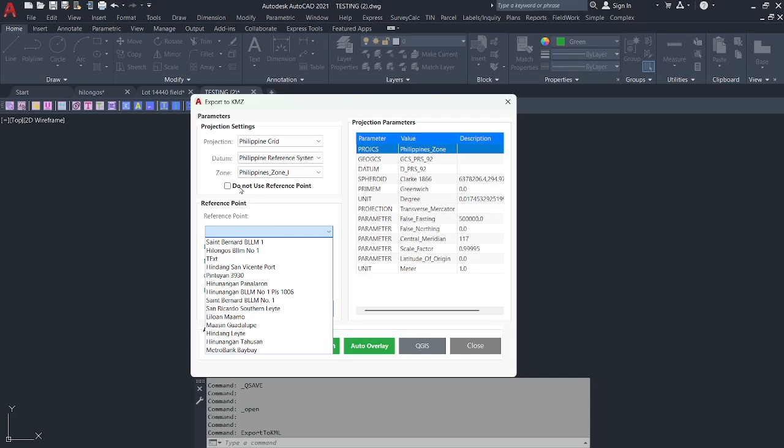Kasi usually noon we use a reference point, right? But this one is not accurate, and the more malayo yung lugar natin sa reference natin, hindi na naging accurate. So ngayon we have the option na hindi na natin gagamitin ang reference point, kundi gagamitin natin yung survey points na resulta ng RTK, yung data ng GPS natin.

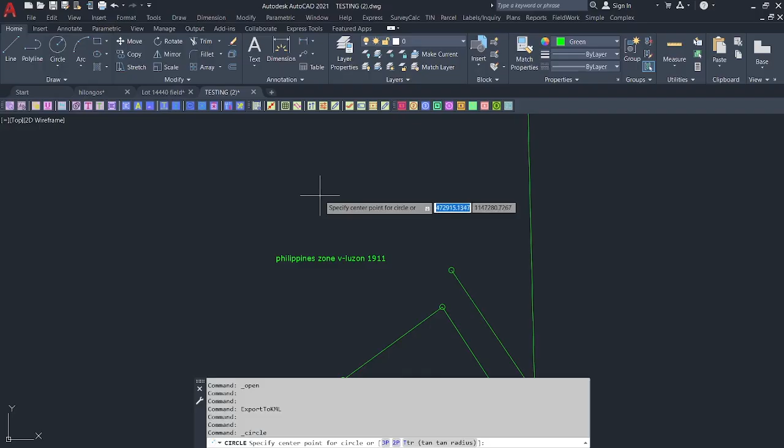So usually I close this one first. Usually pag nagso-survey ako, i-average ko lang, for example dito, ito yung area. Ito is taken from a GPS point. So usually nagsiset up lang ako ng base ko dito. For example diyan nagsiset up ako ng base, tapos ina-average ko yung.

Hinayaan ko yung GPS na mag-a-average ng coordinates sa base station ko. So usually itong GPS ko, hindi ako nag-occupy ng known station or known coordinates. So sa Hi-Target, hindi ko alam sa ibang RTK kung parehas din yun. So nag-a-average ako. Ngayon, once pag nagagawa ka ng job.

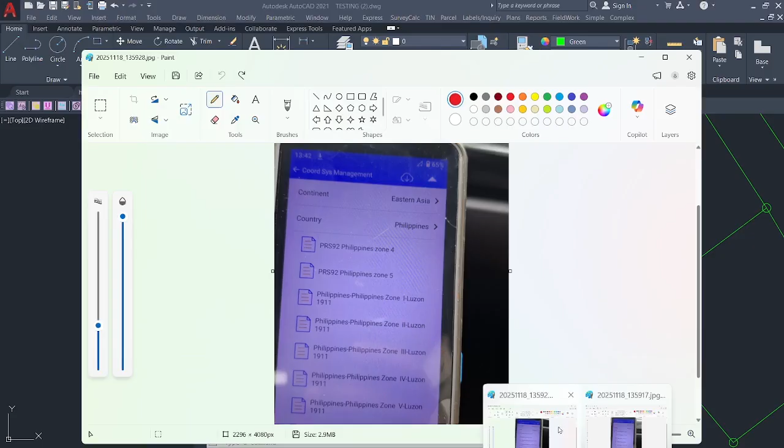Doon sa coordinate system mo, pipiliin niya kung anong coordinate system ang gagamitin mo. Sa Hi-Target, usually ito yung mga reference point, pero siguro parehas naman sa Hi-Target o ibang RTK. So usually meron ditong PRS 92 Philippine Zone, for example 1, 2, 3 Philippine Zone, at saka may Philippine Zone Luzon of 1911.

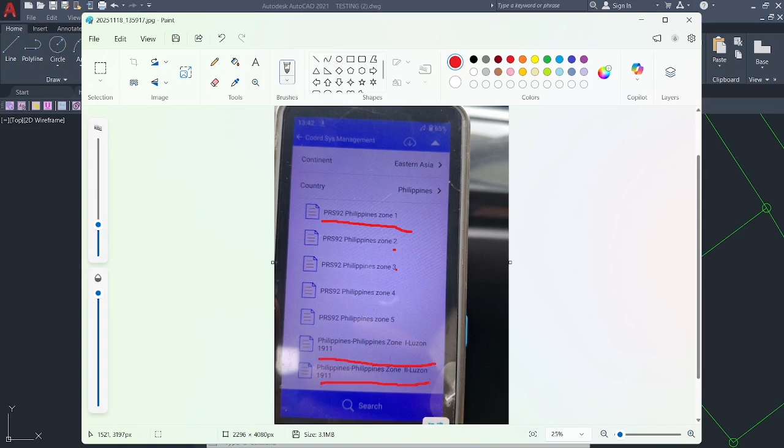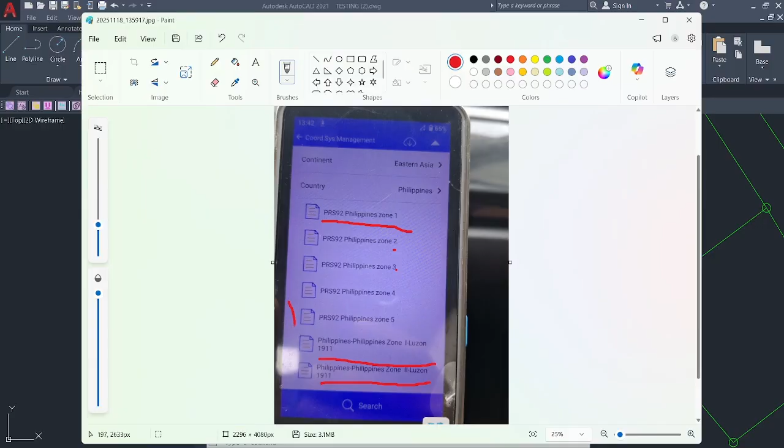Pero for example dito sa Leyte, ito Zone 5 kami. Ito yung ginagamit ko kasi sinusubukan ko sa experiment na ito. Pag ginagamit ko itong PRS 92, andyan mo natin itong lahat. So pag ginagamit ko itong PRS 92 Zone 5, malayo yung coordinates na binibigay ng GPS.

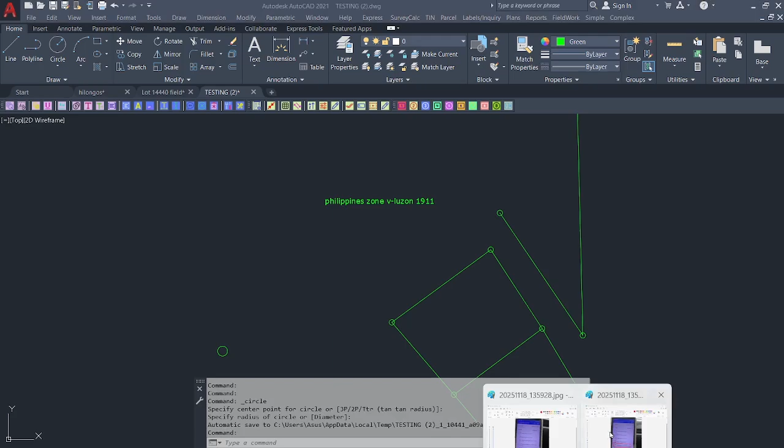So in this example, pinakita ko sa inyo na nag-set up ako dito, nag-reading ako ng fence dito. Yan, fence to. Ito bahay to. Ito fence din to. Pag ito yung ginamit kong coordinate system sa job ko, Philippine Zone 5, Luzon 1911. Ngayon, gumawa din ako ng isang job, ang ginamit ko PRS 92. Ito din, ito yung ginamit ko PRS 92 Zone 5. Pero ang lumalabas na coordinates, sobrang layo dito.

So pina-plot ko, yan. So nagre-reading ako ulit, pero itong coordinate system na ginamit ko sa job, PRS 92 Zone 5, sobrang layo. Ngayon, ipapakita ko sa inyo kung paano natin ito i-export to.

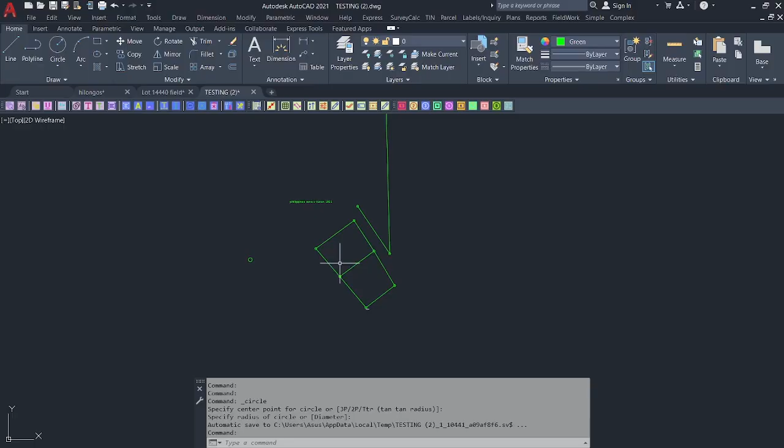KMZ file para ma-overlay sa Google Earth. So ito raw data. Wala akong tie line, hindi ako nagtayo, hindi ako nagsashot ng known points. Hinayaan ko lang yung RTK ko na gagawa ng coordinates based sa average ng RTK using Luzon 1911 of Zone 5.

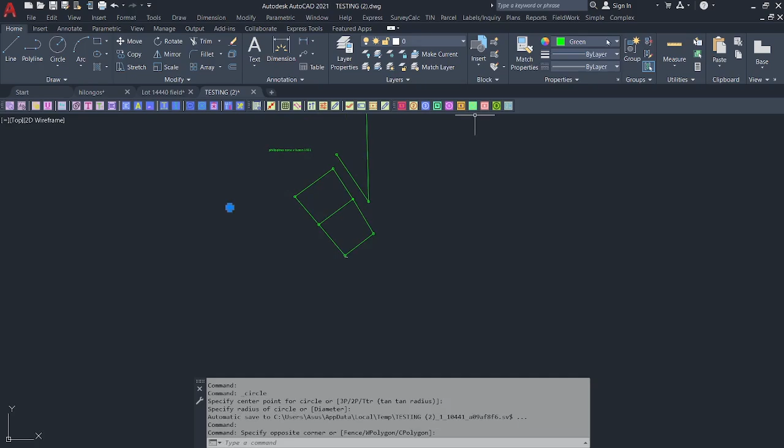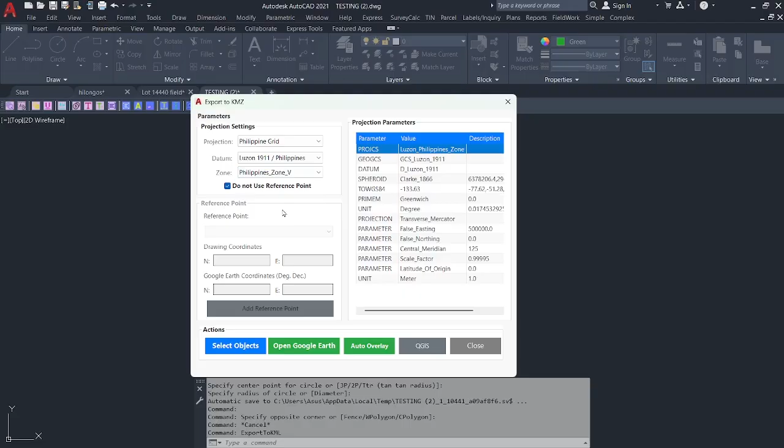So let's try. Punta tayo sa reports, export KML, import satellite image. Dito, pipiliin ko yung datum ko, ito PRS 92. Ngayon, this time subukan ko muna itong Luzon of 1911, then Zone 5. Ngayon, we will not use any reference point. We'll check, the default is do not use reference point. So gagamitin natin yung data ng RTK ng GPS, raw data ng RTK GPS para i-export ito to Google Earth.

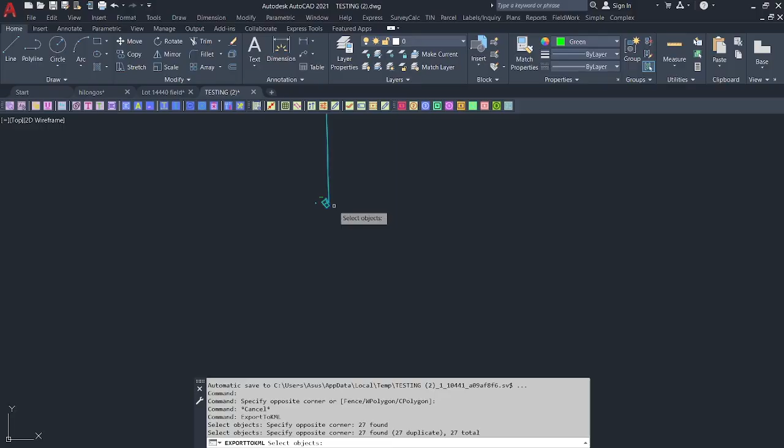I'll select the objects, to-select ko to lahat, para makita natin yung diperensya. Okay, select ko lahat. Okay, so nagkikreate siya. Then we'll open Google Earth, tingnan natin kung ano ang resulta. Let's open.

So tingnan natin, i-zoom natin to. Zoom natin, kung tumama ba sa fence. Diba? So ito yung existing fence na nire-reading ko. Dapat yung naka-north. Oh sorry, try natin naka-north. Yan, so ito yung existing fence na nire-reading ko. Tumatama. Ito yung fence din dito. So at least tumatama siya.

Diba? So hindi na natin kailangan ng base point. Gagamitin lang natin yung vertical natin. Yan, paano natin?